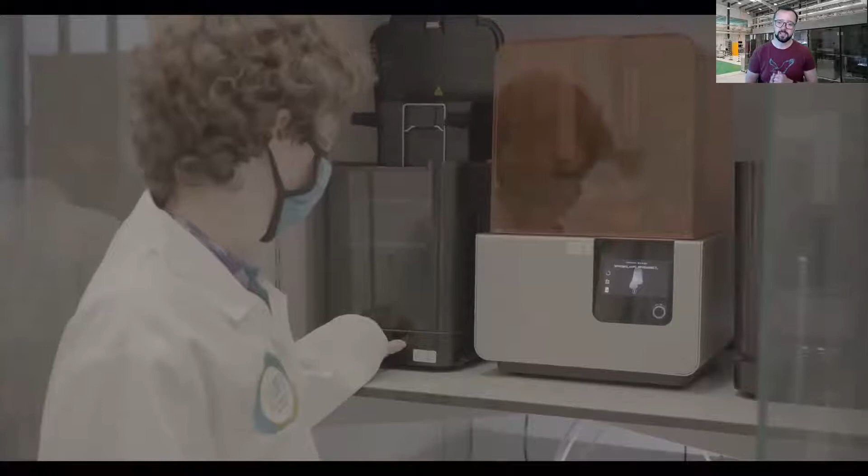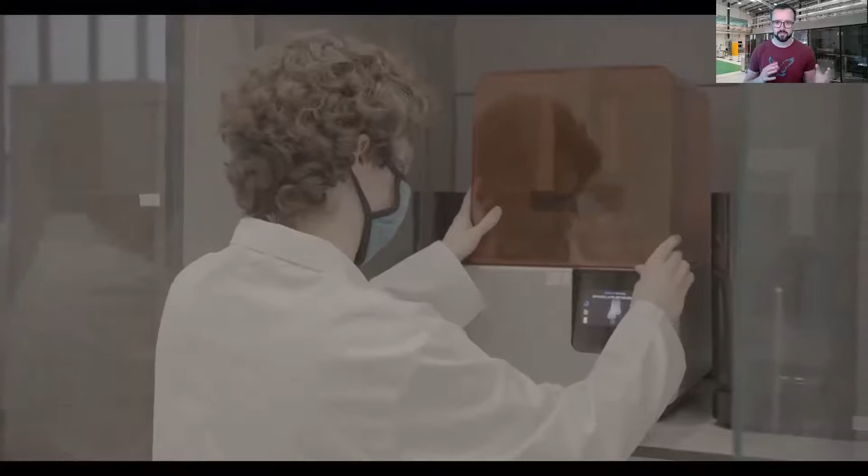Thank you very much, Jordan, for the introduction. Welcome to the Our Innovation Center. Today we're talking about 3D printing with resin. That means multiple things, so we're going to go through a few technologies, and I've also thrown in a bit of 4D printing for good luck, as it was mentioned on LinkedIn and Twitter. So I thought I'd talk to you all about that today. We're going to start off with a very simple technology.

It's called SLA, stereolithography. Here we actually use the Formlabs 3D printer to utilize this technology. I want to go over first a slight bit of history about SLA 3D printing. It was actually the first type of 3D printing invented back in 1983 by a chap called Chuck Hull. Unfortunately, he's in Colorado, USA, so no link to Hull here, but it's good to know that Hull is out there. So that was 1983, the first type of 3D printing ever utilized, and that was the first patent.

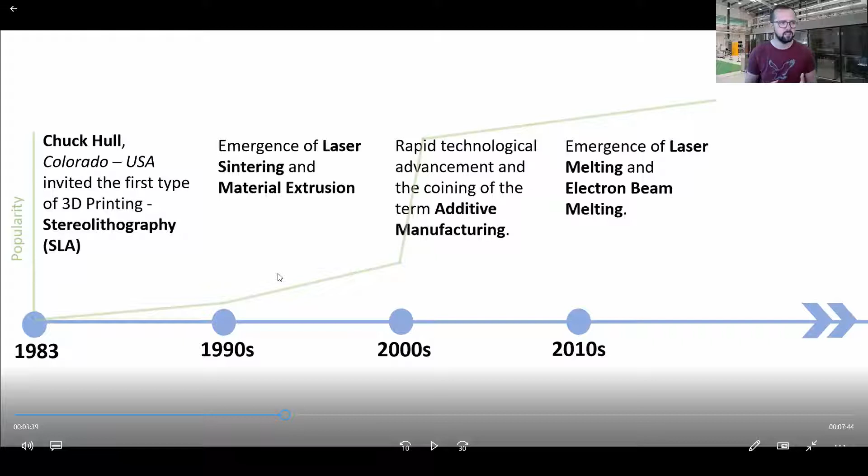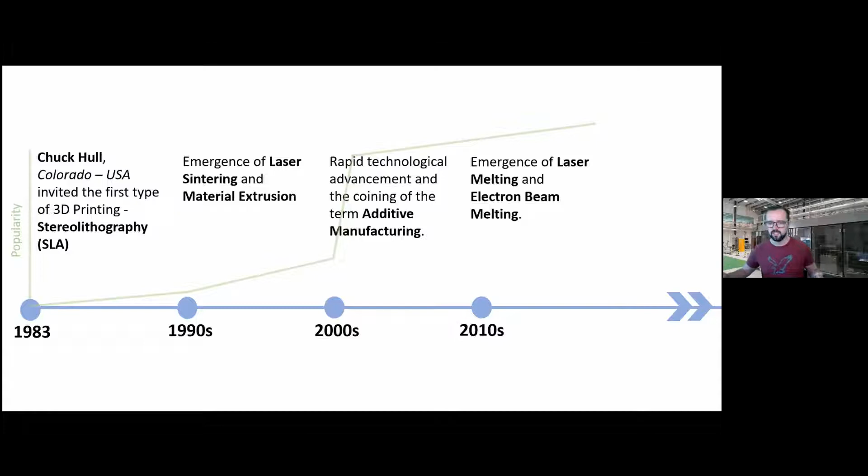From then, it's actually accelerated and grown rapidly, especially from the 2000s to 2010, and now 2010 to 2020. It was a very slow pickup though in that initial period of 1983 to 2000. Technologies such as the FDM 3D printing that we mentioned last week, FFF, and then you've got technologies such as laser sintering, material extrusion, laser melting, electron beam melting. These are a lot more industrial processes that are utilized and have a greater cost to them, but they're currently being used in industry all over the world. It's nice to see this technology has grown from 1983 up to the present day and is rapidly becoming a lot more popular.

So here's a basic sketch of an SLA 3D printer. I just wanted to explain how it worked. This is the inside of an SLA 3D printer - you'll have to bear with me, this is a bit sketchy that I've done here.

The green light is a laser. SLA technology utilizes a laser of a certain wavelength, and what it does is that laser bounces off a mirror into the resin we were talking about - that viscous material that reacts to light. To get the correct part you're printing, you shine the laser at the build plate, which is in the resin, and it cures one layer at a time. Then it lifts up, comes back down, and does a second layer. If you imagine FDM, that's upside down - you have your build plate and it builds on top, like we discussed last week. Whereas this one has the build plate and it builds from underneath, using a different technology as well.

It's quite a clever bit of kit, and while it is simple in principle, it gets more and more complicated, especially as the years have gone on. We're getting to the point now where we can actually do continuous SLA 3D printing, and that's a different technology called CLIP - Continuous Liquid Interface Production. We'll come on to that a bit later as well; I mentioned it in the 4D printing side of it. That's a lot faster technique - usually when you're SLA 3D printing, you build a layer, you have to wait 10, 20 seconds to do your next layer, same again, and that builds up over 200 layers to a massive time.

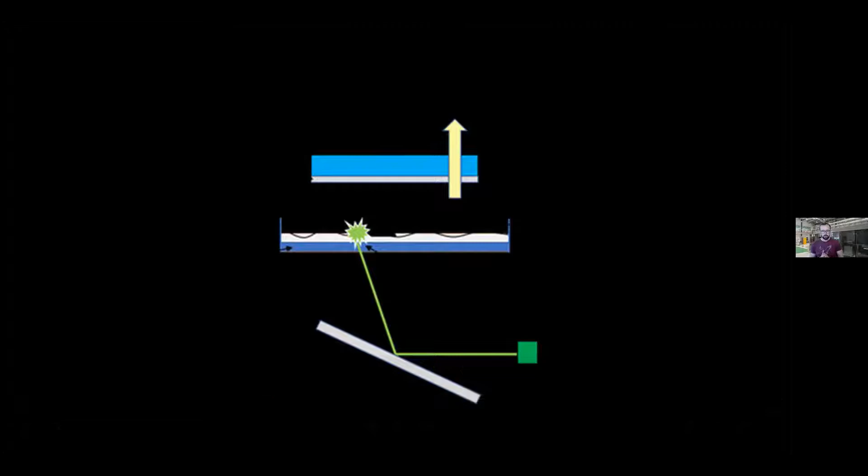So that's the basics of SLA, and we'll go back to our Formlabs 3D printer that I have sketched up in CAD.

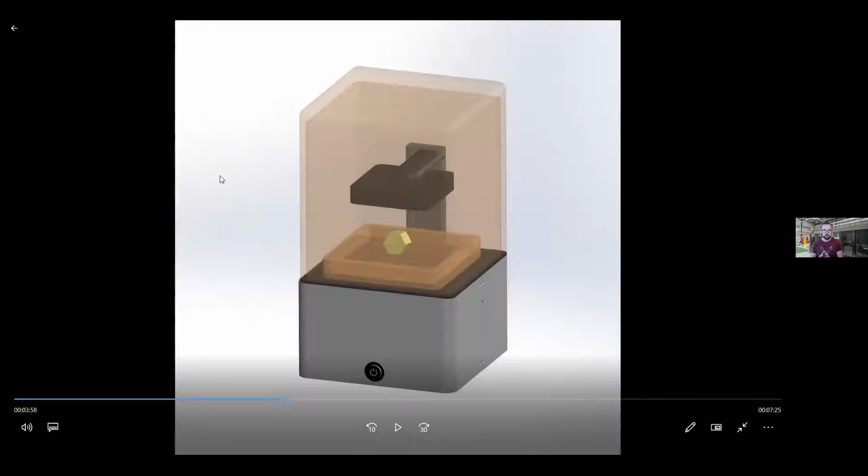So here's the lovely Jordan. He's just demonstrating more 3D printing devices we have here.

SLA 3D printing is the box in the middle that we can see in a second, and you can also see it behind me in my background. This is the one that does all the work. Then after printing, you have to do post-processing to get all the benefits out of your product. This post-processing is washing with alcohol, and curing with more UV light.

But what is the material that you're utilizing? If you can see this picture, it's this orange liquid. And you can see the Eiffel Tower just emerging up out of it. This is a very basic setup from a good decade ago, and you can just see it raising up out of this vat of liquid, almost like a sci-fi movie.

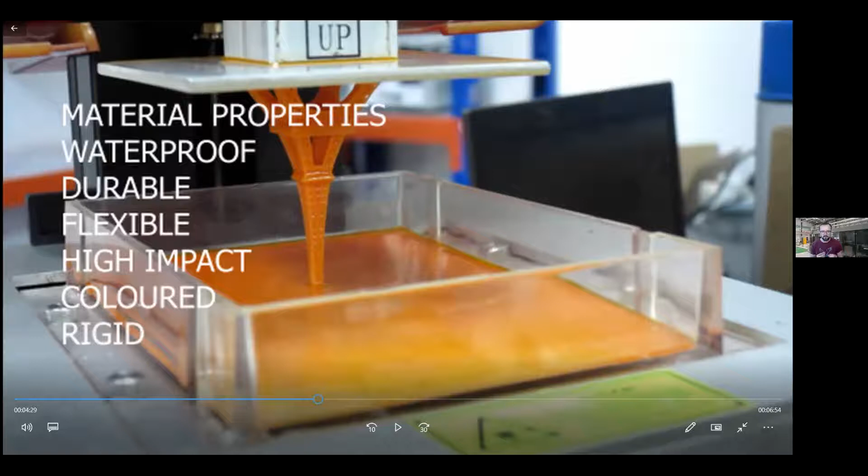The properties of this material that you can get out of it as well is, well, for one, it's waterproof. Water just doesn't penetrate into the material. It's a polymer, it's a plastic. It's not like PLA that will take up water. It is hydrophobic by nature. It's a very durable material.

You can even go as far as buying durable resins to utilize that have a greater durability built into them. You can get resins that are flexible, that give you flexible qualities. So in this example, we 3D printed a heart out of a flexible resin. You can actually hold it in your hands and clench it and make it sort of beat almost like a heart. You could probably hook up a vacuum to it as well and make it go in and out. So very flexible materials. You can also get elastic materials. You can get materials that are high impact. So if you've got an application that requires a high impact material, SLA 3D printing can do that.

You can get colored materials. And now some manufacturers are going so far as you can generate your own color. So if you've got a brand out there that has a certain color behind it, a certain shade of purple, green, pink, you can actually color your material to match. So you can do loads of 3D printing in that color for your company.

And then we've also got rigid 3D printing as well. So rigid material, again, suitable for applications needing that hard impact strength. There's a lot of applications out there for SLA 3D printing. There really is no limit.

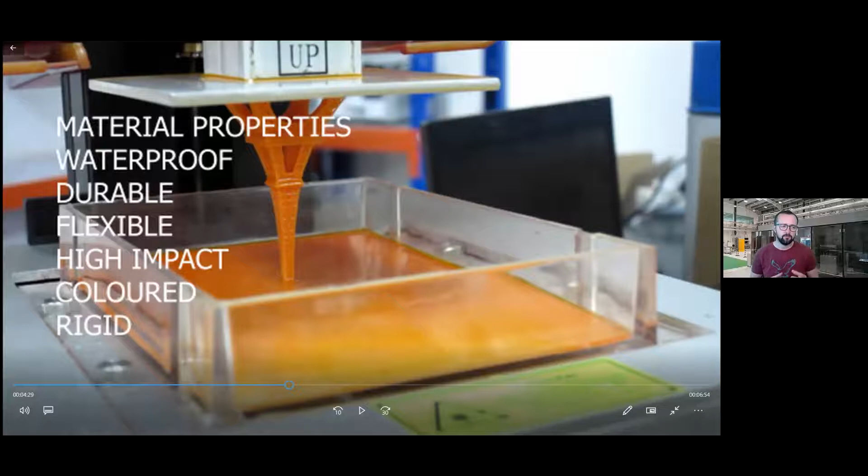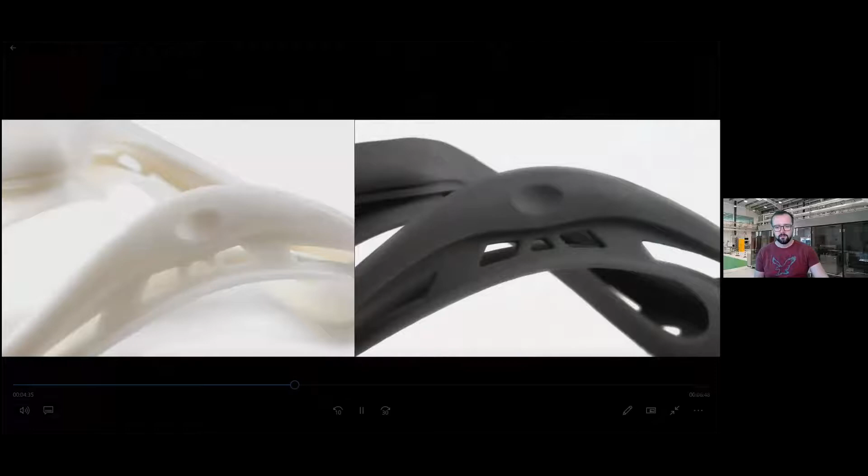So I want to just show you two materials here. These are both SLA 3D printed. On the left, this is the lowest resolution - I believe this is 50 micron. You can actually see the layers in it. And then on the other side, we've got a really fine one and you can't even see the layers.

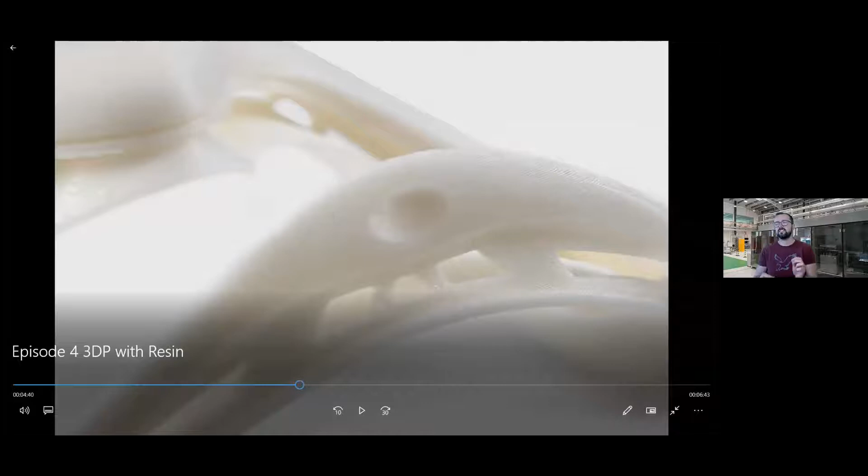So if you can see the layers in this, this is how it builds it, this is how it processes it. So we can go from this resolution, and this is quite a fast print - it will probably take less than an hour to do. You can see the surface finish isn't great, but it's done in a rapid amount of time. You'd probably call this a draft product.

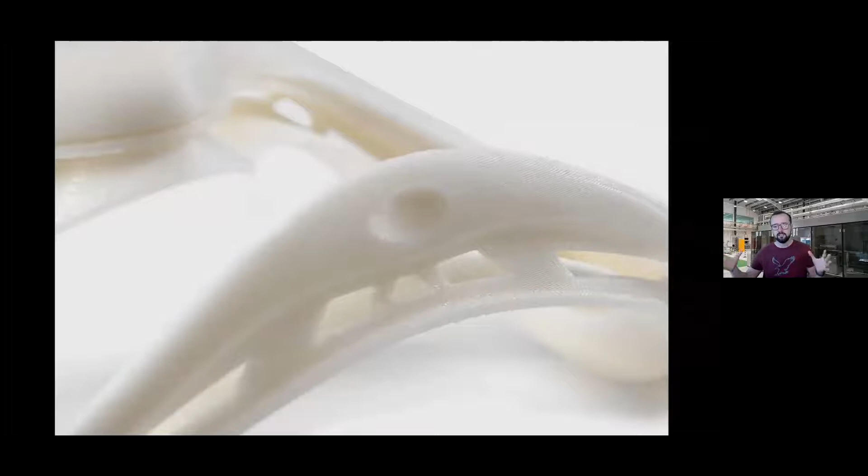Whereas if you did it nice and slow, this is probably many, many hundreds of layers to make each section here. This resolution is tiny. And this is done on the same printer. I'm not even sure if you could see the layers in this picture if you looked hard, but you can see the texture as well as the beautiful finish on it. And that's all from one 3D printer. So again, if you've got an application that needs a quick draft, we can do it on SLA, nice and fast. We can also do these finer detailed prints as well.

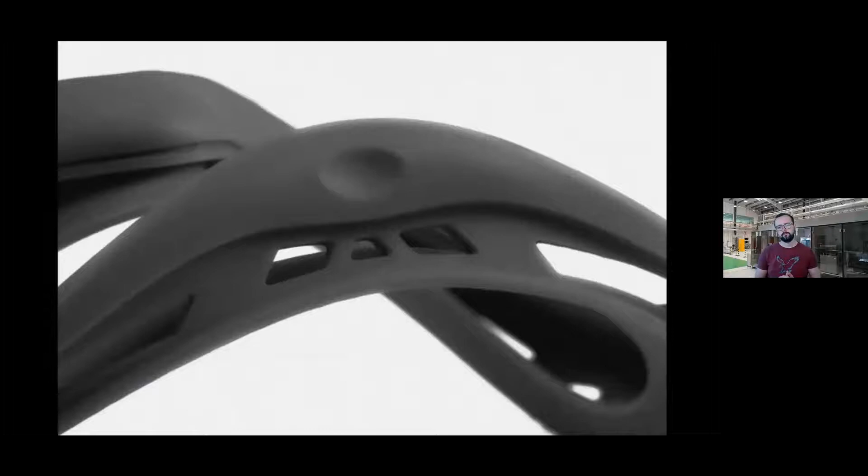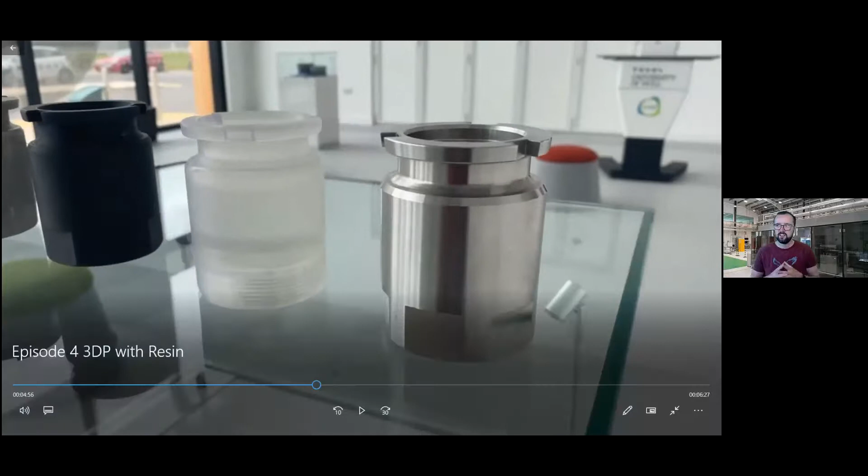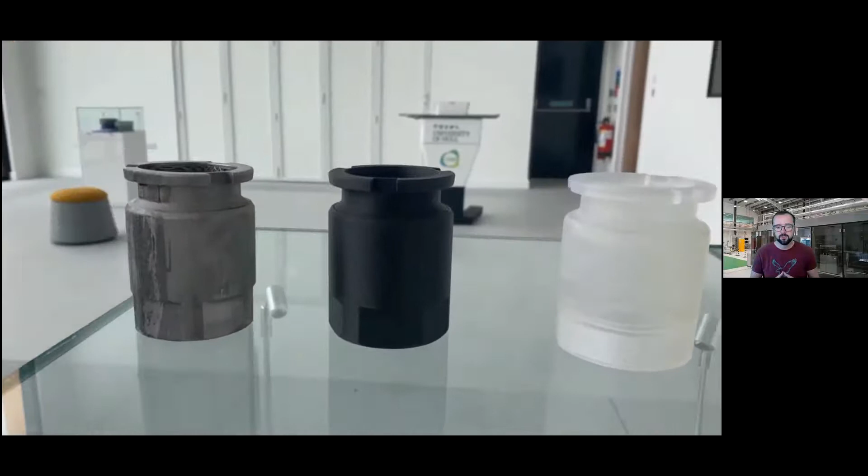So here we're getting onto a bit of a case study. This is a company we've actually been working with. On the right is their metal tool device that they give us. Going through the line here, we'll see different 3D printed materials. Right next to it is the clear one printed from the SLA printer. Next to it is our Markforged, our FFF 3D printer. And the last one is our metal 3D printer, which we'll talk about next week.

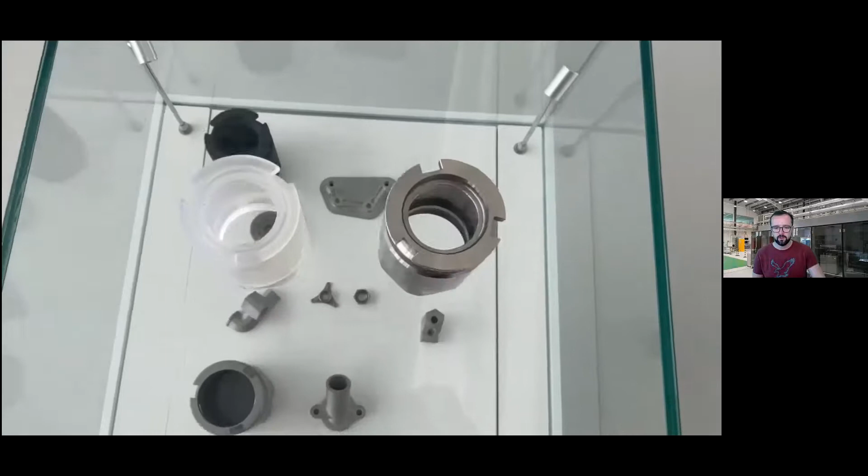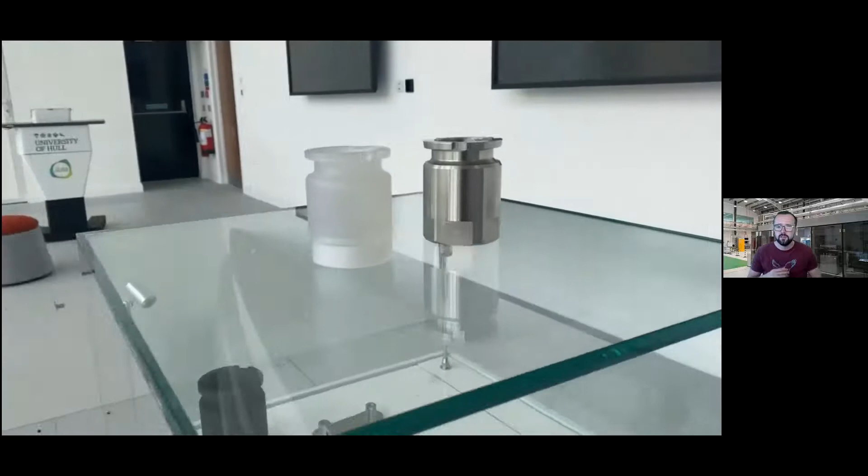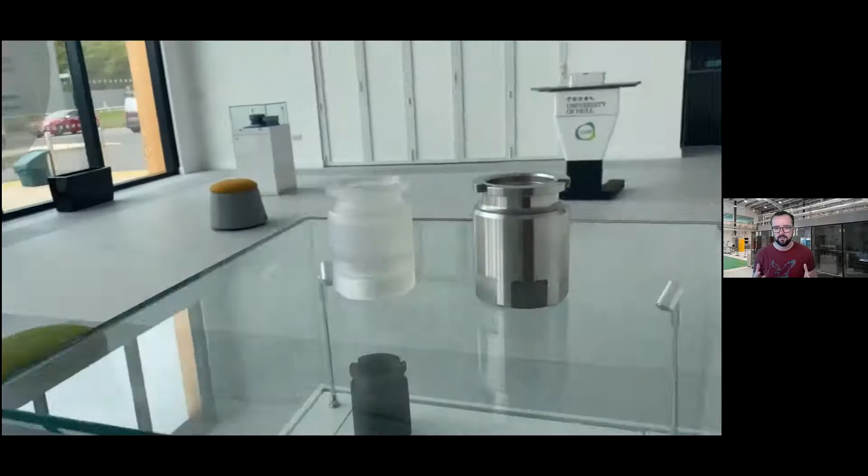So these are all from one design, one file, but many different materials. Here we are comparing the metal to the resin. It's exactly the same shape, but you can actually see through it, which is very important if you're doing something like a demonstration. You can actually see liquid flowing through the material if you needed to.

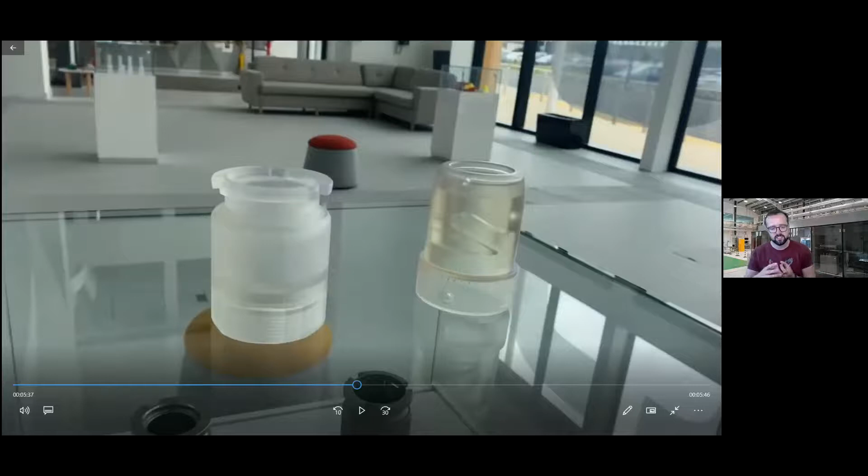So here's a nice close-up. And if we ran blue liquid through it, for instance, you could see it flow through. It's a very nice design with an intricate lock inside.

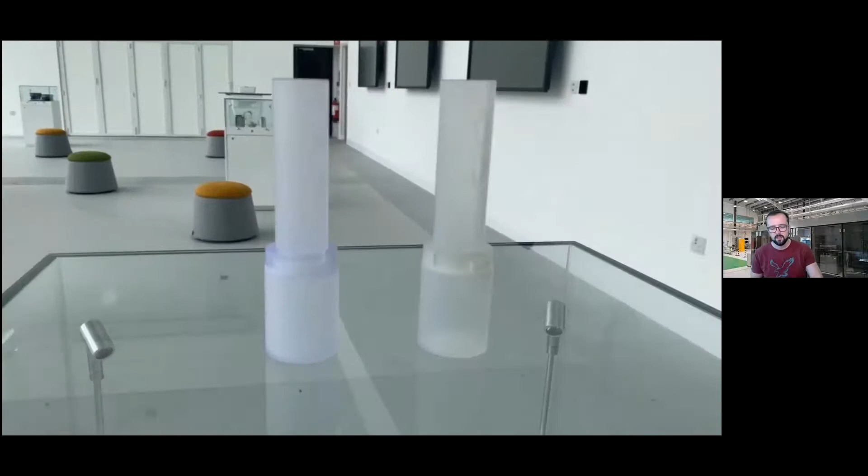This is another example of 3D printing, but this actually has a wider application, and this application is for medical applications. So this is for, well, I can't really say what it's for, but it's for a medical device.

So if there's any businesses out there that are looking at medical devices that need to go into batch production - if you're a client and you're looking to do a medical test and you need a device for a run of 100, I would recommend SLA 3D printing and this medical grade resin to do it.

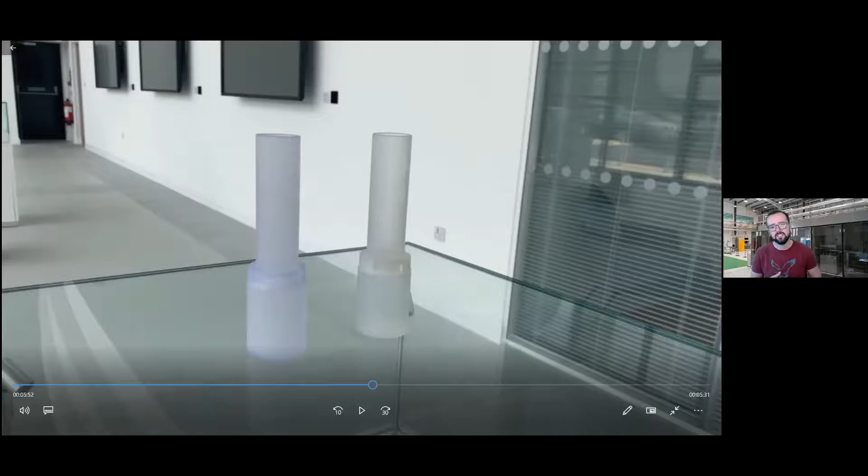Because you'll always get advice back from your medical results saying that a design needs to be changed, or this needs to be changed - maybe it needs to be bigger, smaller, depending on the patient. And that's something that's so easy to do if you've 3D printed it, and at that stage it's a lot harder to correct if you've gone through the tooling process and generated it that way.

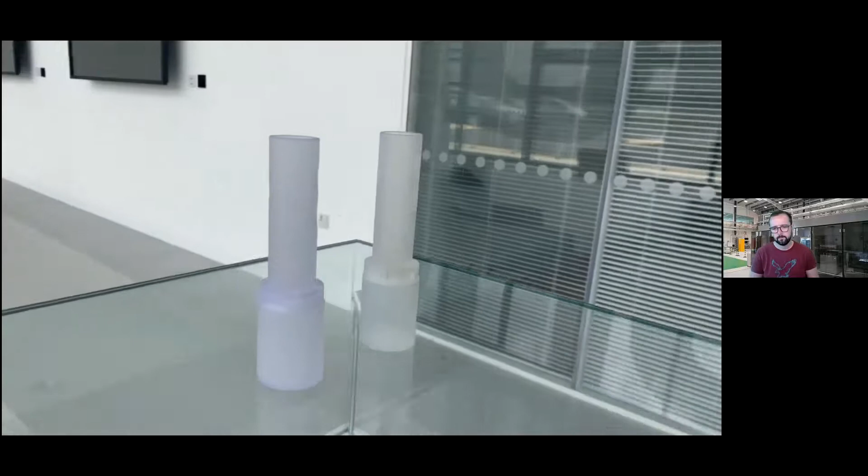So yeah, on the right is the medical one, on the left is the normal one.

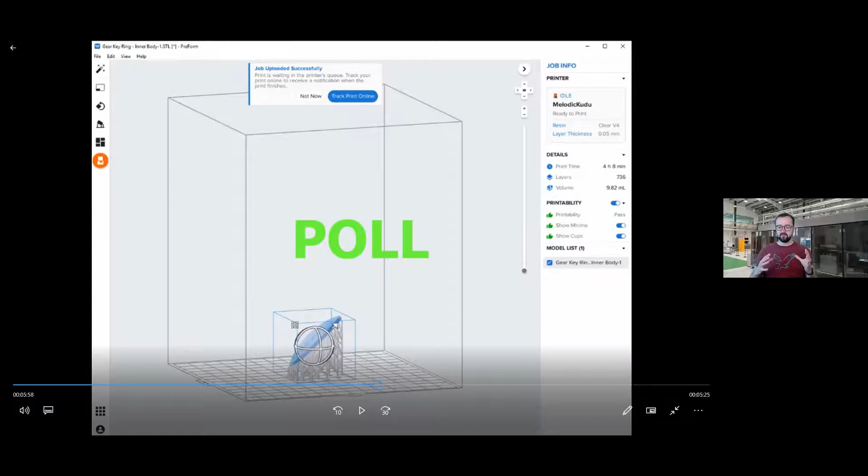So I have a few questions here. First question is, what kind of difference are we looking at for print speeds between SLA printers and more traditional printers, such as the filament printers we went through last week? Yeah, that's a good question. The print speeds - it depends on the resolution. So if you go for that draft resolution that we were looking at, I would say it's comparable with FDM 3D printing. But if you're going for that very, very fine resolution, you're doing a lot more layers - you're probably doing, say, 1,000 layers of material, whereas in an FDM print, you're probably only doing 400, 500. So yes, high resolution will take a lot longer, but comparably, draft for draft, it's about the same.

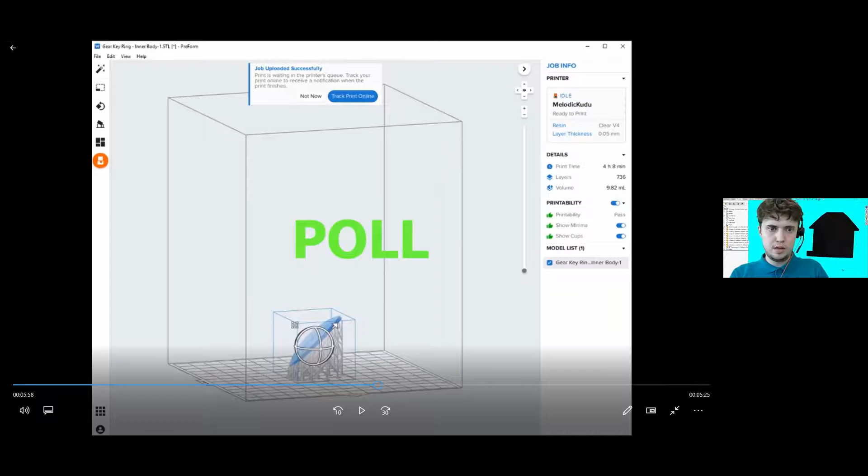And then we have a question about the medical resin: is this resin safe to be used inside the body, or is this just for outside applications? Yeah, definitely just outside applications. I wouldn't say ingest any, definitely not. It could be used in surgical applications because it can be that level of sterilization, but I definitely wouldn't use it for bones or hip replacements or anything like that.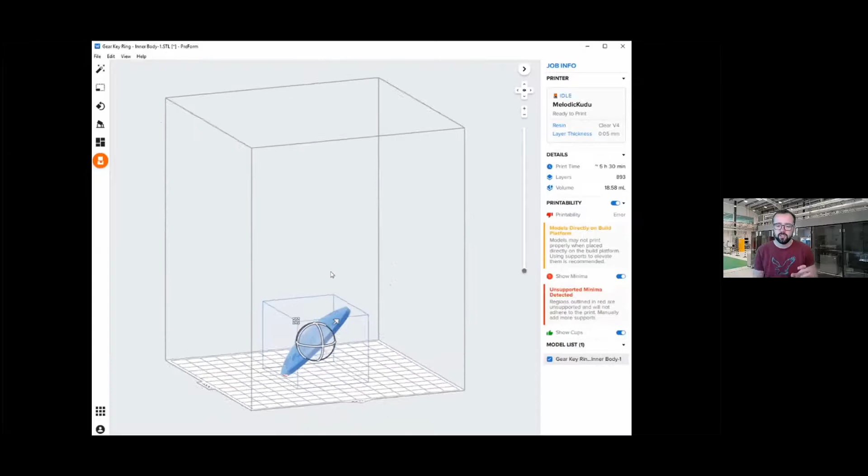So we're going to go into the background of SLA 3D printing now. Here we're going to go through slicing a print for SLA 3D printing. This is one of Jordan's CAD models that he'll show you on his webinar. We're rotating it around to have a look, and you can change what orientation you have the device in.

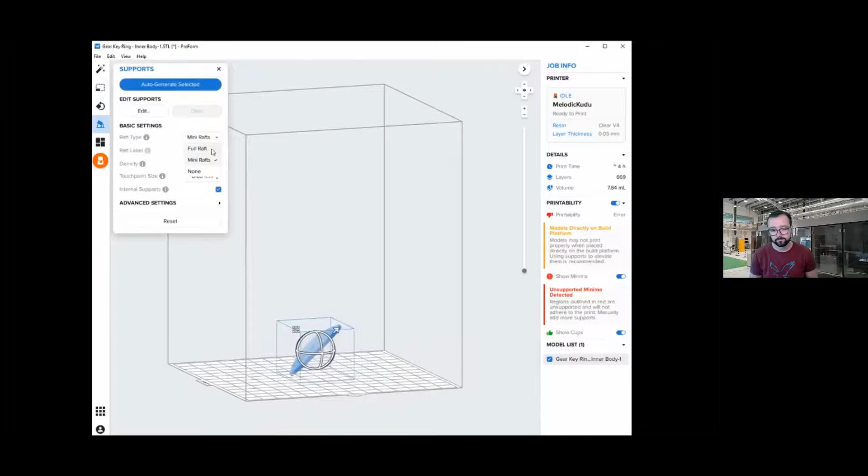There are different orientations depending on how you want to print it. We always print at an angle because you get better build quality. Then what you do is generate supports. Supports are required to make sure that if you've got a print at a slant, the last bit of the print will get printed fine. You need to put supports underneath it to support the actual print. So this is what's happening here.

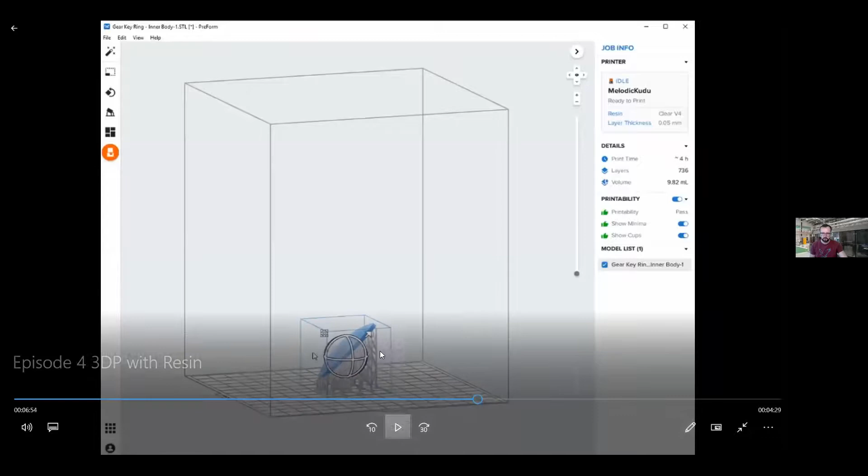We're just choosing a resolution here. You can see these little struts going down just below my finger. I've got a video just after this showing you all the supports around it, actually 3D printed. These are all the supports around it, and you have to take them off after printing, but they are required to 3D print the device. You could potentially print it flat on the build base itself, but you run into a whole host of problems, so we actually advise printing at an angle.

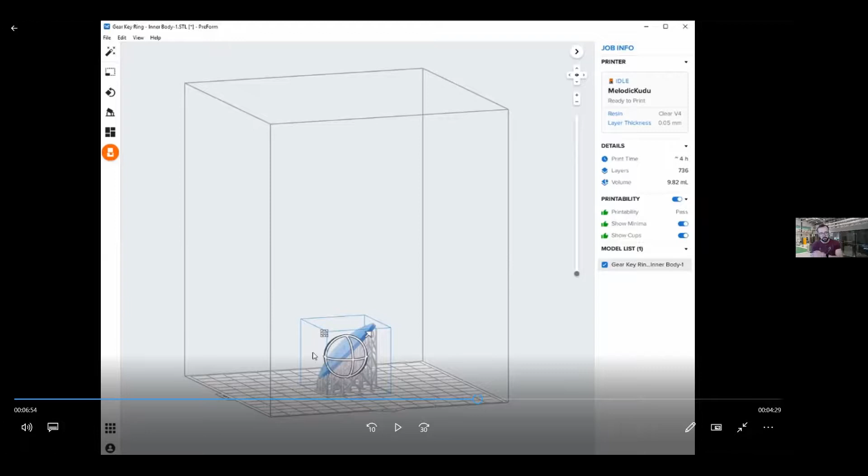I'll just play that. So up next, we're sending it to the 3D printer as well. It's all on Wi-Fi, so we don't have to move anywhere, we can just do it all on the Wi-Fi.

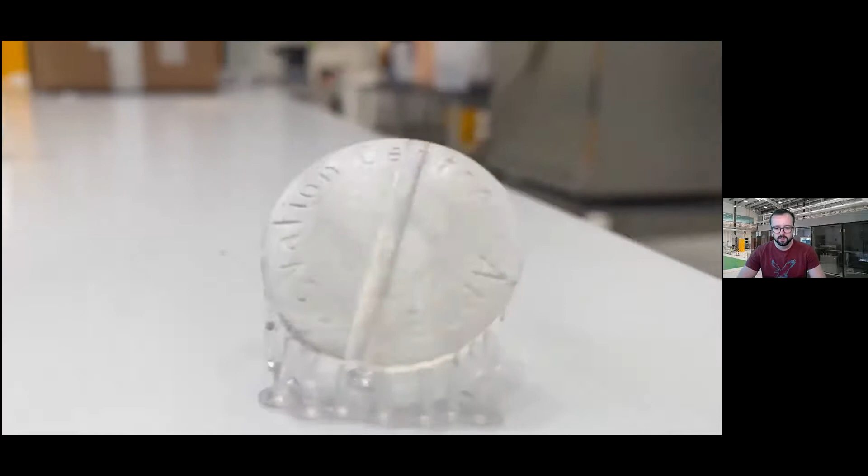Here is the actual print. You can see the supports around it that are still on, just coming back into focus. You can see all these lovely supports just holding it. It's not many supports on it, and it's done at a strange angle as well. That's called overhang, where anything is past a 45-degree level - it has trouble getting built.

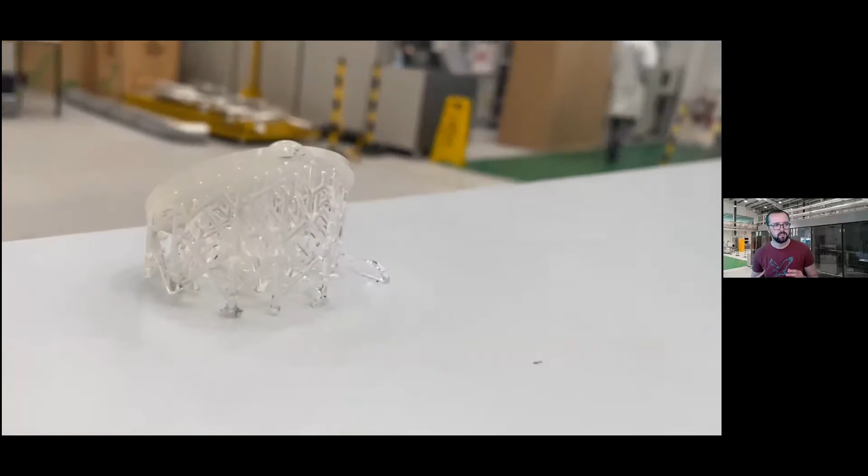So we've got a small one here, and I think we go to a large one next. This has got a lot more supports, and you can choose the density of supports, but that's generally down to the technical support rather than the actual client. The client is just interested in the product itself after it's been post-processed, washed, dried, and sanded down if needed to get rid of any bits and bobs stuck on there.

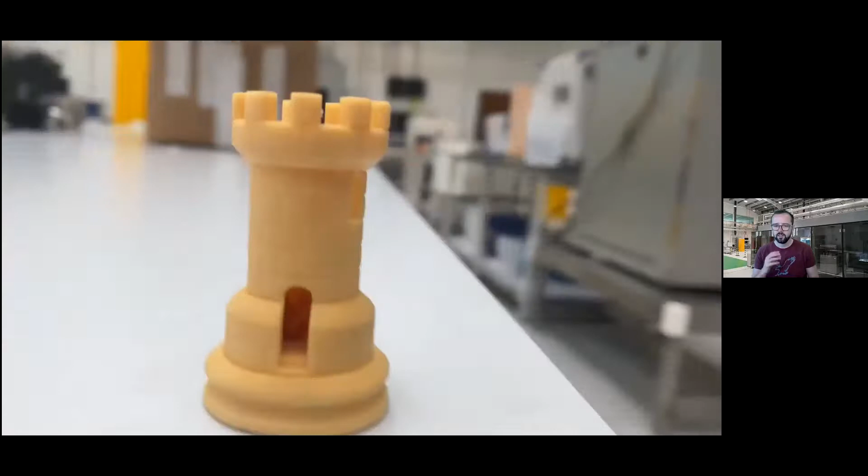Another thing - this has actually been SLA 3D printed. This was on a photocentric device, which is another type of 3D printing, but I haven't gone into that today. You can't actually see the layer lines on this; it's so intricate and so fine that you struggle to see it.

Inside there's a staircase as well - I go up and do an overhead shot. It's a DNA sequence and a staircase just inside. You can't see it too well there, but you can see the staircase, you can see its little turrets, and there's a little DNA in there as well.

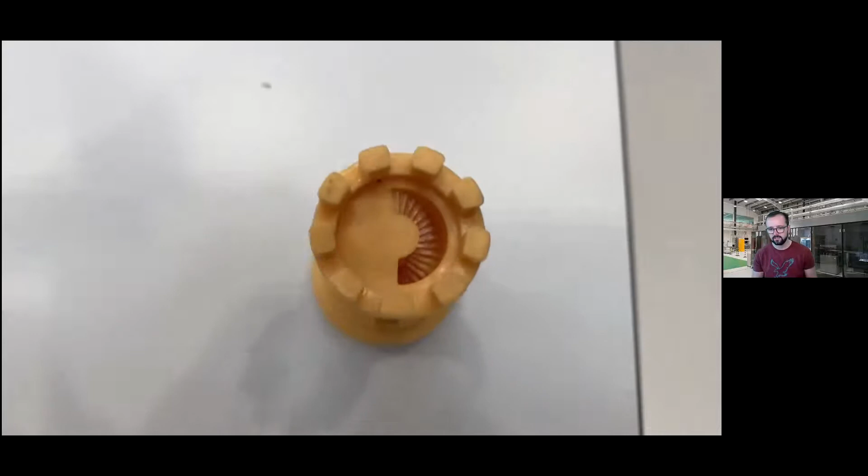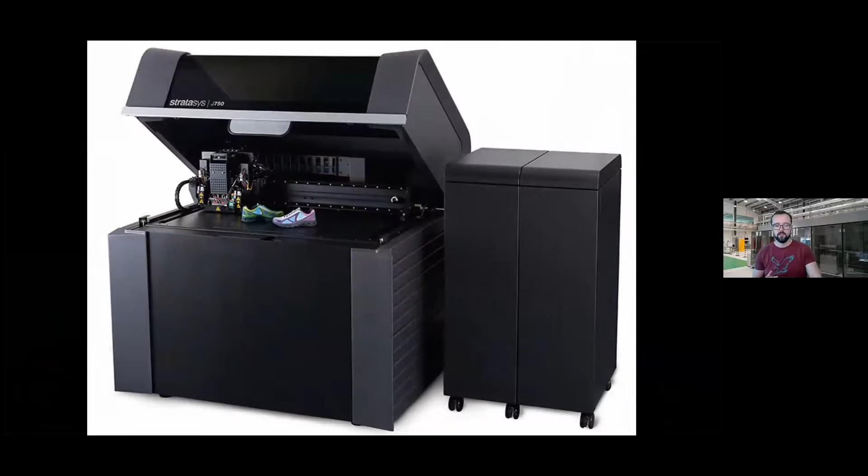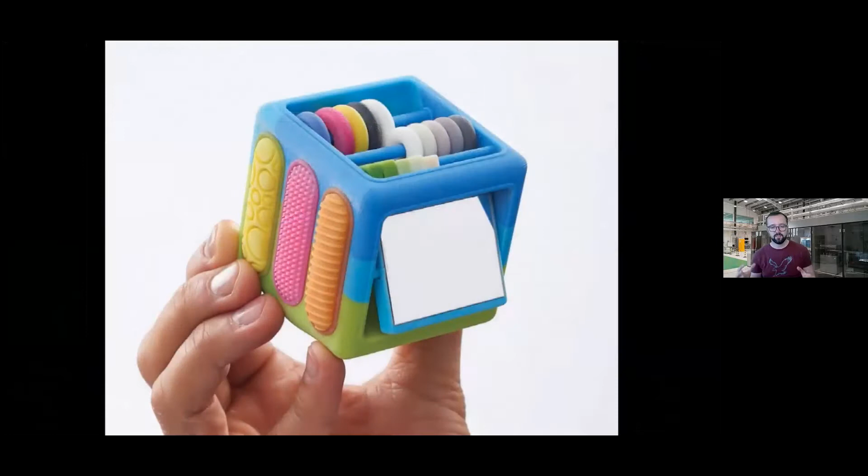We're going to go into a different type of 3D printing now. This is another service that the University of Hull offer - the use of the J750. This is a very high-end 3D printer used for multiple colors and multiple applications as well.

It can actually 3D print a device with moving parts and moving functions, different textures, different materials, and different blends of color. It's a very high-end product finish. So if you're looking for that very, very high-end product finish to take to an investor or take somewhere, then I would recommend this 3D printer.

I've just taken this from the Stratasys website. The way it's better is that you can design the file and send it to the printer - there's no need to color it afterwards, no need to paint it, no painstaking coloration of fiddling around. So say if you 3D printed a shoe, you don't have to go in and color it all - the 3D printer does all that for you, and it comes out in an amazing quality.

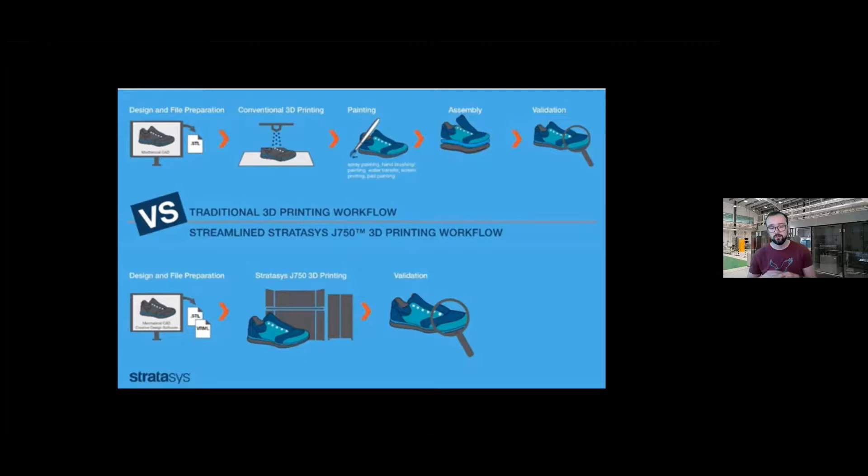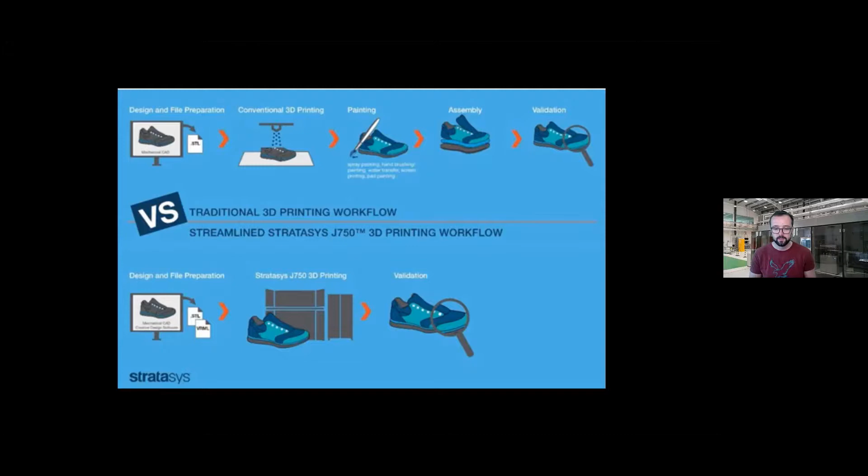So this is called PolyJet 3D printing. It's for that finished look.

It can be quite an expensive 3D print, but if you're going to an investor, you want to spend that money and get it done. Or if it's for a certain application that requires a certain material, a certain rubber, a certain elasticity, this is the job for you. So it can do all sorts - shoes, we've got a brain head, it can do all this intricate stuff. It's a great bit of kit. So again, that's something we offer here at the University of Hull, very high-end bespoke products.

So I think we're just going to go to another poll as well, just to catch up with everyone and check where they are. Would you be interested in either SLA or PolyJet 3D printing, or both? Did they pique your interest? And then, have you ever heard of 4D printing before this webinar? It's a weird question, but we are just about to go into the 4D printing section.

Brilliant, thank you very much for everyone who answered the poll. Would you be interested in SLA or PolyJet? All of you have said both, everyone said both, which is great. So please do get in contact if you are interested in them. And then, have you ever heard of 4D printing before this webinar? We've got a split down the middle, 50-50 - half have heard of it, and the other half haven't. So hopefully we can get you up to speed with what 4D printing is.

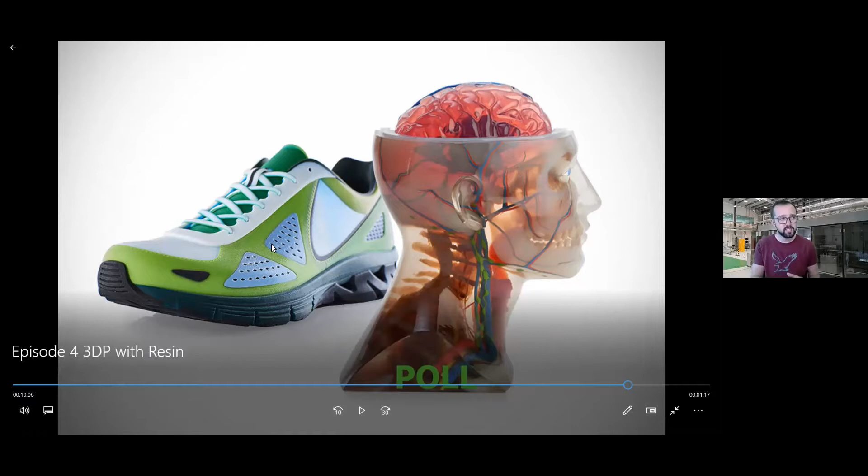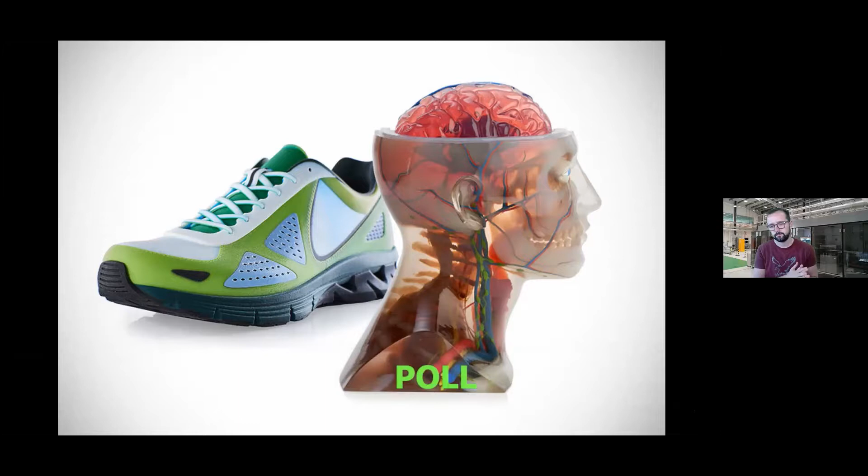So I've previously done a webinar on 4D printing, it's available on YouTube, so please do check it out. It was done with the 3D crowd. Just going to talk briefly about what 4D printing is, and how I describe it is actually time-dependent 3D printing - it's 3D printing with effects that continue beyond the print.

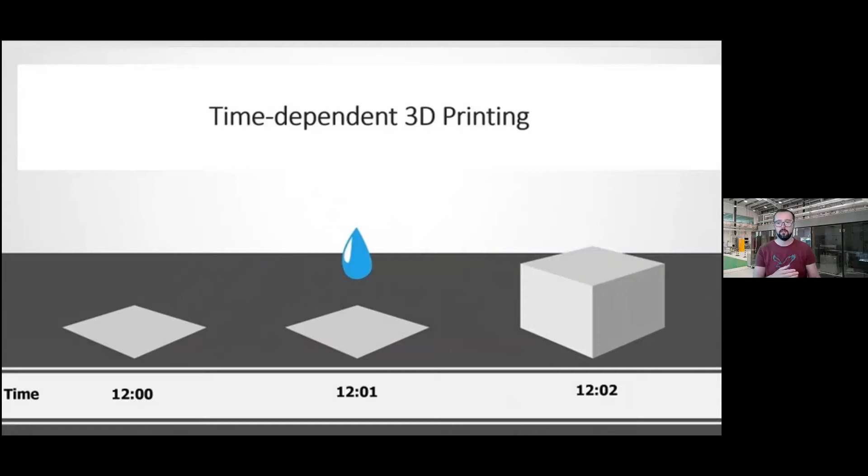So if you 3D print something, let's say I 3D print this dice, it's a dice, that's all it does. It sits here, it doesn't move, doesn't change properties, doesn't do anything. But if I printed it with a material that could react to sunlight and it would change shape over time, that would be time-dependent 3D printing.

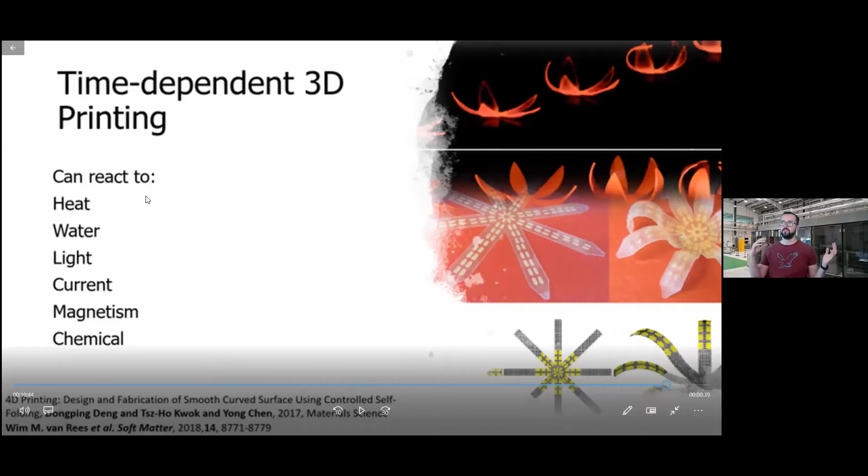So time-dependent 3D printing has different variables or different things it can react to. It could be heat, light, water, electric current, magnetism. It could react to a chemical change. There's a lot that can interact with 4D printing. So yeah, if you're interested, please do go see my webinar.

Who uses it? Loads of people: Adidas, Autodesk, NASA. I've actually got a pair of 4D printed shoes from Adidas, which are awesome.

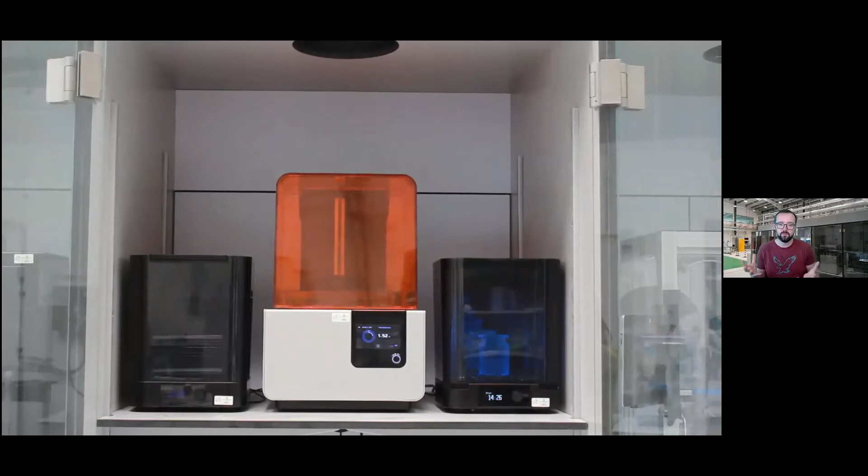So as a quick rundown, we're just going to run off. So we've got SLA 3D printing - this is where we 3D print our designs with this clear material, tough material, elastic material. We've got PolyJet 3D printing for these high-end bespoke prints, which we can offer here at the University of Hull.